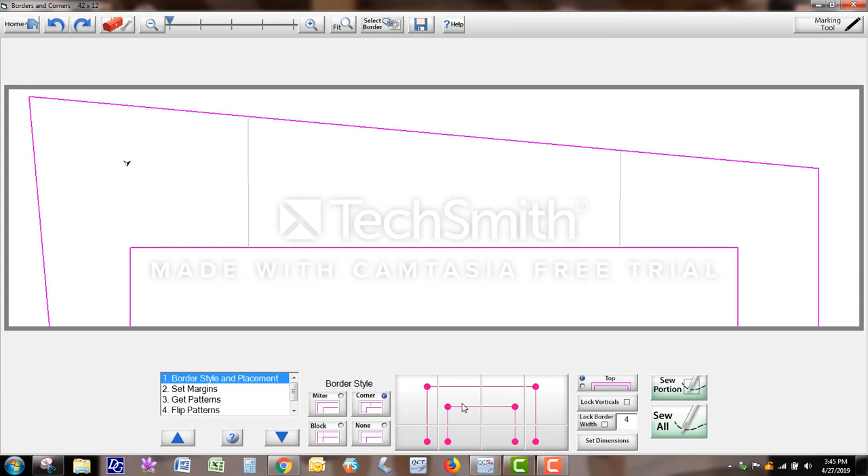Maybe I need to do a little bit lower, like that, and then come over to the far right, and you use these buttons in the same way. You can keep playing with these, so don't stress over it at first.

And now these lines here are represented by the buttons on the bottom. One thing you can do is select lock verticals, and if you do that, then when I had set this inner border, this line would automatically go straight. But as I know, and you probably know as well, not all borders are straight, and sometimes it's not loaded on your machine straight.

So if you take lock verticals off, you can select an area where, you know, just drag your machine down the side of your quilt, and maybe it just goes in a little bit, and then select these buttons. So you're moving your machine around to all these places, and then you're selecting these buttons on the screen.

Okay, and I'm going to say this is good. Maybe my border's a little fat right here. So the next thing you do is, well, you want to look at this too.

This is your top, this up here on the screen. If you press the bottom, it'll show you what it's going to look like on the bottom, which is, this is just where we're going to lay out our designs.

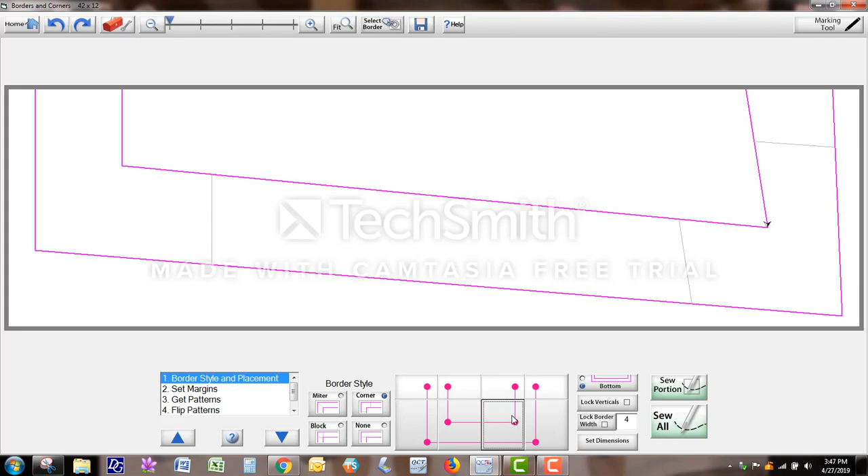When you get to the bottom of your quilt, you're going to have to do the same thing I just did. So for instance, this button here represents the far right corner, so I would select the far right corner, and then the inner corner, the inner border, and then the far left, and then the inner border here.

And of course this is moving my machine to those points and selecting these buttons here, tapping these with your mouse or your finger or whatever your system uses.

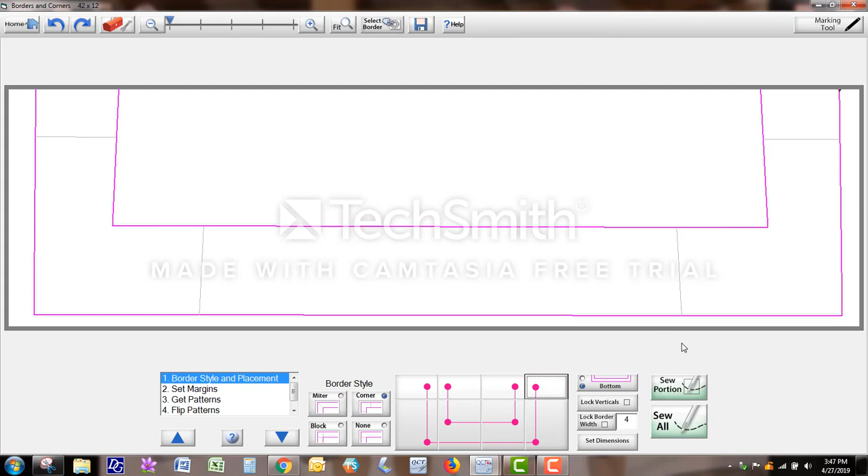So I know that's not very straight, but I just want to show you how that works. Okay, so I'm going to go back to the top because that's where we're working now. My quilt is rolled where it is at the top, and I need to replace it. Okay, so I'm going to do the inner piece. I'm going to hit lock vertical so that these will stay, just to save time.

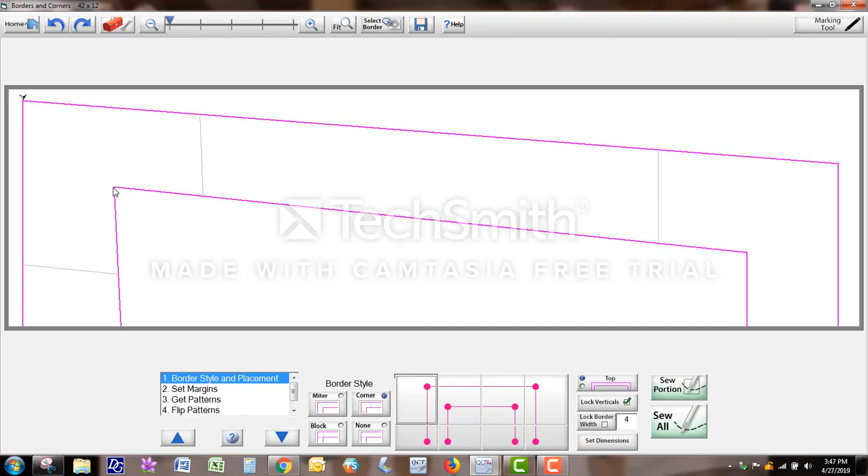And this is why I was saying just put a practice piece on and draw some lines. I have about 4-inch borders, and that's probably enough to be able to see your pattern. You don't want to waste too much thread. Okay, so this represents my quilt top, and I'm happy with that. That works out fine. So the next thing you want to do is come down. This window here is your 1, 2, 3, 4, 5 step menu. So the next step is to come down and set your margins. You can click on set margins, or you can click the down arrow.

And these margins are saying where within this border do you want the design to stitch. Right now it's going to stitch all the way to the purple line on both sides. Well, since I know I have to leave some room for the binding up here, I like to make the margins on the outside a little bit larger. So I'm going to unlock this. You'll see why in a minute. Now as I start to press the outer border, see the gray line? That means it's going to stitch at the gray line, not the purple line. So that leaves me some room for the binding. And I'm going to go ahead and put it at 1/2 inch.

And then the inside border, just because I don't want my design to come over into my quilt, I'm going to put that at 1/8 inch. So you can see those lines now. And that's all you do there. And then you go down to the next one, which is to get your pattern. You're going to pick your corner pattern, your border pattern, and then you can put another pattern in the center if you want. Make sure autofill is checked, and the system will automatically fill your area based on the dimensions that you set when you marked your quilt in step number 1.

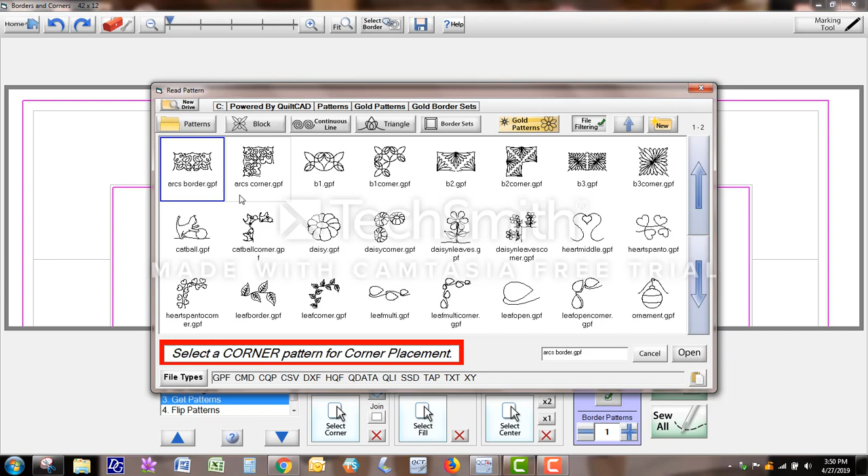So the first thing I'm going to do is get the corner. So you just click on select corner, and under gold patterns, there's a gold border set, and you'll have many other borders as well. I'm just going to go with this first one, the Arcs corner. Select that and see how it placed it perfectly in here. Okay, and then I'm going to get the border, which is the Arcs border. Open, and the autofill is going to determine that I needed 3 of those to fill the space. Now that looks really good.

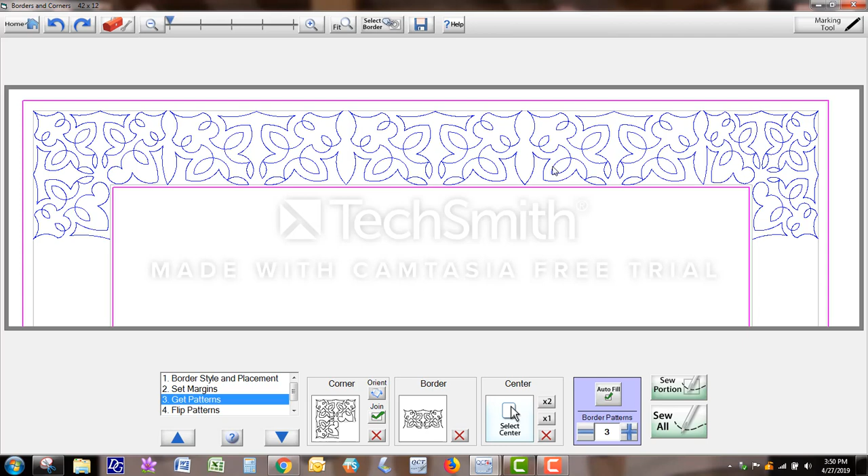And because on the border style and placement menu I had checked lock verticals, this border is also set as my bottom border. So when I get to that border, it will be there for me. Okay, I want to go back to the top because I've got my quilt rolled so that it's at the top. Because I am in simulation mode, it keeps making me realign everything, but on your quilt it should not do that. Okay, so I've gotten the patterns.

The next thing is to flip the patterns if you want to. I've only had to do this one time, and it was with a different border, and I had to actually flip the corner so that it would match. See how my corner actually ends right here, and then my pattern starts here, but I want those two to match. So I had to flip that time. But if you're doing the borders from Grace, you probably won't have to do that. And it also tells me here how many border patterns I have.

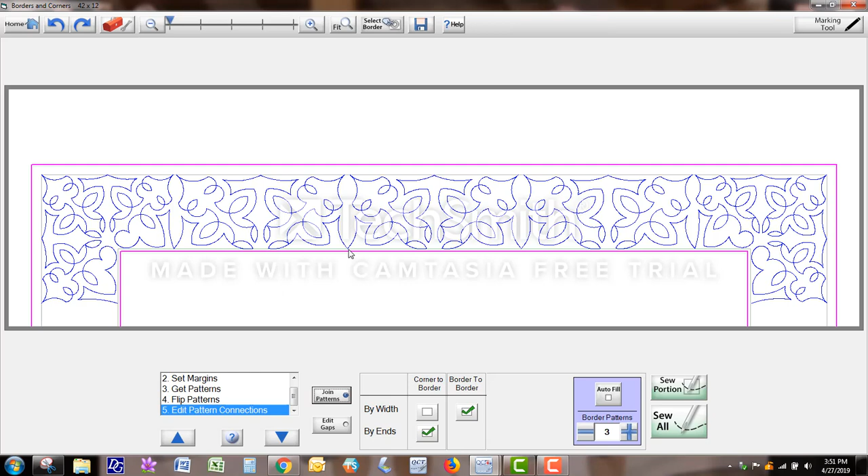So then the next thing is edit pattern connections. I don't really have to do anything here. Join patterns is selected. What that did was make my patterns join right here and right here, just like we talked about. And if you want to verify that, you can always click the plus sign up here, and you can see that they actually match. So I'm going